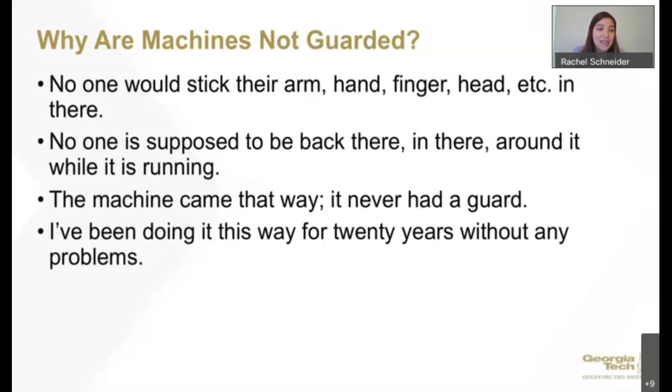And then, the guard is in the way, right? So during this webinar, we are going to discuss different ways that you can guard your machines. If a particular guard is in the way, or if it's introduced a new hazard in itself, then you will want to reevaluate your machine and see if there are alternative ways to protect your employees from the machine hazards.

And then, the OSHA inspector didn't say anything about it. Just because the OSHA inspector didn't say anything about it does not mean that you are now exempt from guarding your machinery. There are many reasons why an OSHA inspector may not address a particular machine. Maybe you had an industrial hygienist as your inspector and they were focused on health hazards, or maybe they were just focused on a particular area of your plant.

And then, we'll put it back on if OSHA comes. So when it comes to machine guarding, the point is not just to please the OSHA inspector. The reason why OSHA exists and the reason why the machine guarding standard exists is so that employees are protected from machine hazards, so that they're not killed or seriously injured on the job.

So one of the main concerns with machinery and machines not being guarded properly are amputations. And amputations can occur on many different types of equipment if they are not properly guarded.

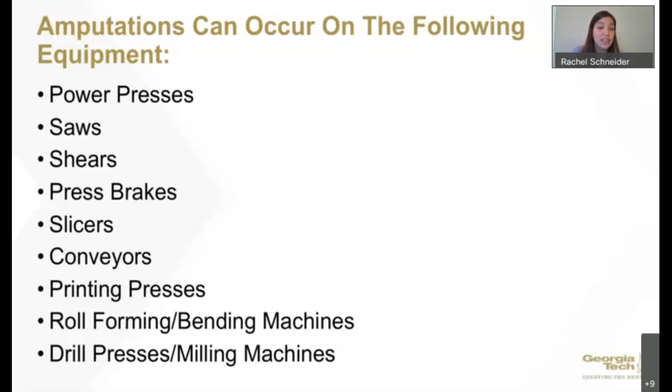Hazards can occur in several places on a piece of equipment. They can occur at the point of operation. So say you have a shear, the point of operation is going to be that shear point, where the cutting is being done. Or if you have a press, the area where the press comes down is your point of operation. If your hands are in that area when the machine is operating, it's very likely that you could lose some fingers or a hand.

Machine hazards can also be present on your mechanical power transmission equipment, like belts and pulleys, chains and sprockets, rotating shafts, flywheels, basically any equipment where a piece of clothing, a limb, or hair could get caught into or around it. Those are all going to be hazards. And then any other moving parts, so any rotating parts, sometimes vibrating or shaking parts may also pose a hazard.

When you guard machines, you want to make sure that they prevent hazards, so employees should not be able to access those machine hazards. The guards also need to be secured to the equipment so that employees can't just lift them off. I have been to plenty of facilities where they have a guard that's placed tenderly over the equipment, and then an employee needs to inspect something and lifts it up easily, and now they're exposed to those hazards. That's not okay. Your guards have to be secured to your equipment.

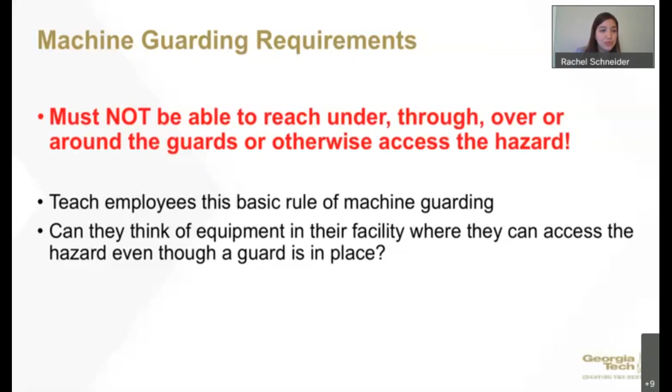Here are some examples of different machine hazards that may be present. We've got chains and sprockets, meshing gears, a punch press, belts and pulleys, even fans, a bench grinder - the bench grinder is actually well guarded here - a rotating auger, and a shear. All of these pieces of equipment would need to be guarded.

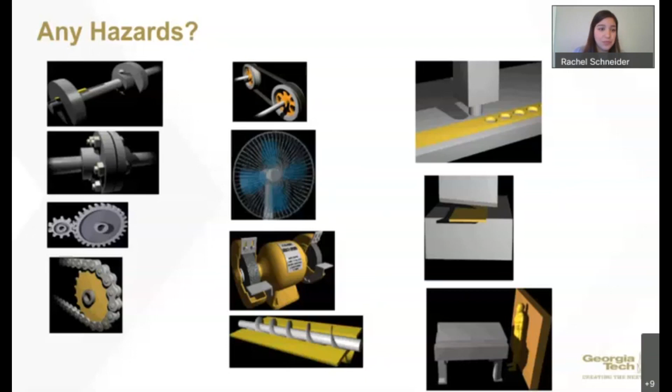There are three different methods of machine safeguarding or machine guarding, and we'll get into each of these methods in more detail. You can have physical guards like your barrier guards, you can have devices like light curtains or laser systems or pressure sensitive mats, or you could also guard by location or distance.

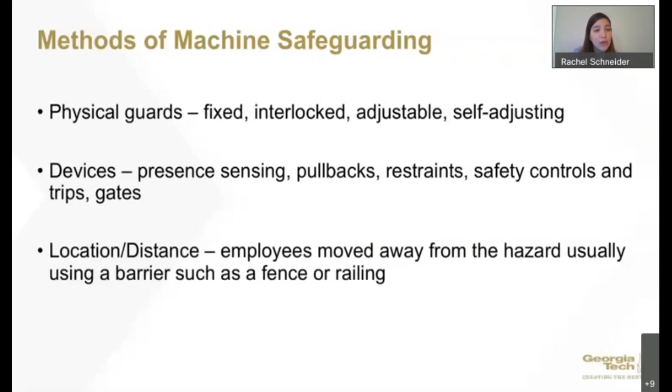Physical guards may be fixed guards, secured to a machine. Say maybe you have a chain drive or chains and sprockets, then you would close them with a fixed guard or a barrier guard. Physical guards may also be interlocked, so that if you open them during the operation of the machine, it will shut off. Some machines are going to be equipped with adjustable guards, where the operator will need to adjust the guard to accommodate for the size of the stock being worked on.

Other guards include self-adjusting guards, where the guard will actually adjust based upon the width of the stock that's being fed into the equipment. An example of a self-adjusting guard is a hood guard on a table saw - as you're feeding wood into the saw, the guard lifts up and allows you to feed the stock in. When we talk about presence sensing or safeguarding devices, we're talking about light curtains or laser systems, where if you break the plane, the machine will shut off.

We really don't see pullbacks and restraints anymore as a means of guarding, but they were once used to guard machines like press brakes to prevent operators from accessing the point of operation. We do see safety controls and safety trips, such as trip wires, pressure sensitive mats, and two-hand controls. And we also see gates, which are used to prevent the operator from being exposed to the point of operation once the machine begins to operate.

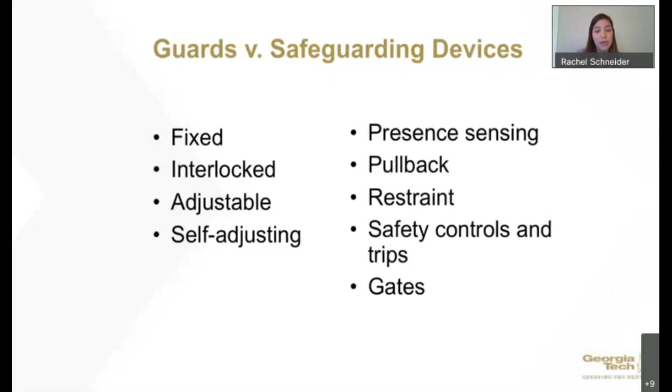All right, so this is a diagram that demonstrates how large the openings in a guard can be given the distance the guard is from the point of operation. One device that we use as consultants is what we call the gotcha stick, which is basically used to measure exactly what this diagram is showing. On the x-axis, you have the distance between the guard and the point of operation, and on the y-axis, you have the maximum opening allowed in the guard. As you move further away from the point of operation, the size of the opening allowed in the guard increases.

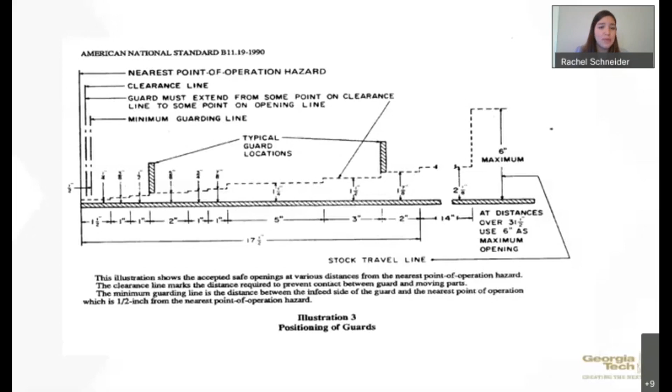So these gotcha sticks are really useful, especially if you aren't sure if a guard is sufficient. You can use the device against the guard to see if the openings are too large or if they're sufficient. I know you can get these online - Rockford Systems sells them, I've seen them on Amazon before, but they're very handy.

Whereas these guards may not be favorable for hazards at the point of operation where moving parts are performing work on the stock. So if a fixed guard isn't feasible or practical for guarding the point of operation, there are still several different types of safeguarding that are possible.

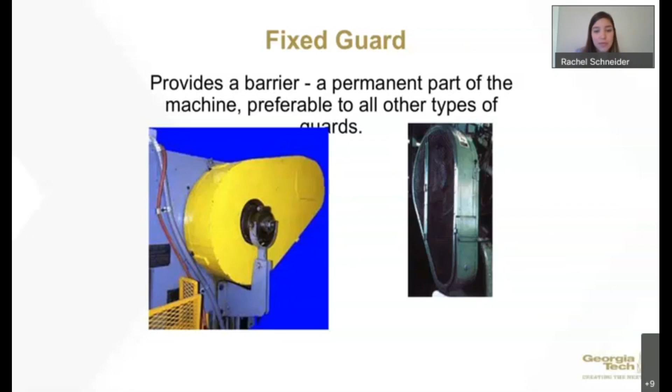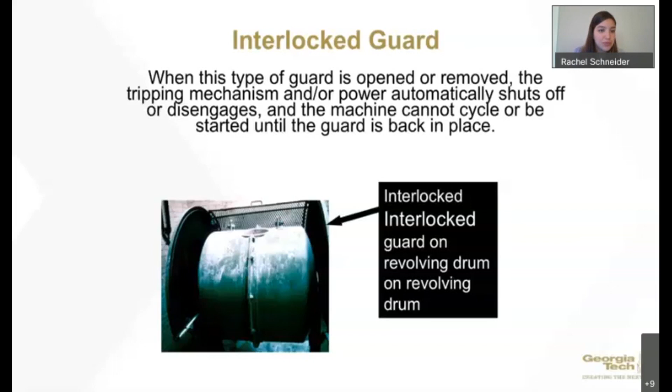We typically see adjustable guards being used on bandsaws, but with bandsaws you want to make sure the non-working portion of the blade is guarded. If you have vertical bandsaws, you want to check underneath your tables and make sure the blade underneath the table is also guarded. So when I say the non-working portion of the blade, that means the area where the work is not being done. Only the part of the saw where the cutting is being done can be left exposed - everything else would need to be guarded.

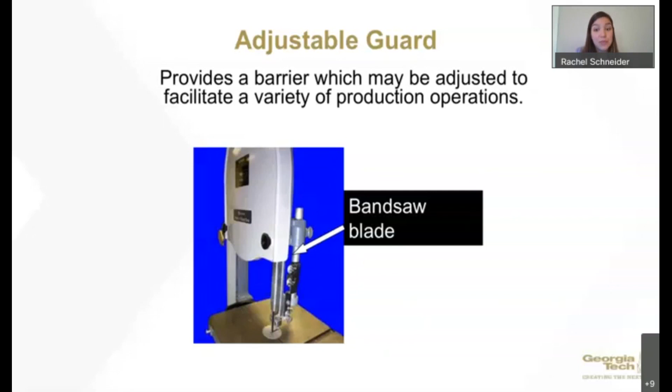With self-adjusting guards, the guards themselves will move and adjust according to the size of the stock being worked on. These guards are frequently seen on woodworking equipment, like table saws, chop saws, and radial saws too. Self-adjusting guards do avoid that potential for human error associated with just your adjustable guards, but the main problem we see with these guards is that employees will take them off. So if you have self-adjusting guards on your equipment, just make sure they stay in place - if they're in place, they'll do their job, but you need to make sure employees are not removing them.

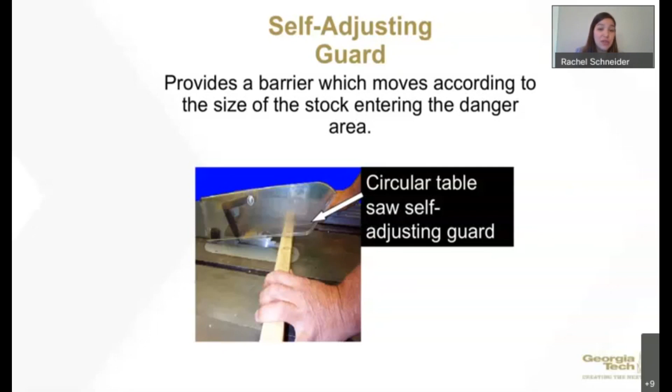All right, so now we will move into some different types of safeguarding devices.

Presence sensing devices include light curtains, laser systems, also bump guards. With light curtains and laser systems, you have to set up the rods, and then they create a plane, and whenever the machine operator crosses the plane, the machine will stop operating. These are very effective ways to guard machines such as press brakes and power presses, but you still need to make sure they're set up properly and that they're functioning properly.

I have seen plenty of power presses where the front and the sides of the press are equipped with light curtains, but then the back of the press is left completely exposed. So you do need to make sure every area where employees may access the hazard is accounted for. Employees should also test the light curtains or laser systems to ensure they are functioning properly.

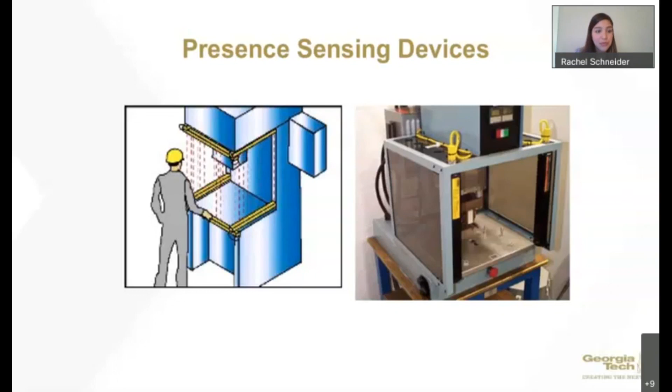All right, so here is an example of a light curtain. You have the rods on both sides, and those pink bars represent the invisible plane. If that employee crosses that plane, the machine should shut off. This is a good example of a well-guarded machine because not only do you have the light curtains at the front, but you also have barrier guards on the sides of the machine as well.

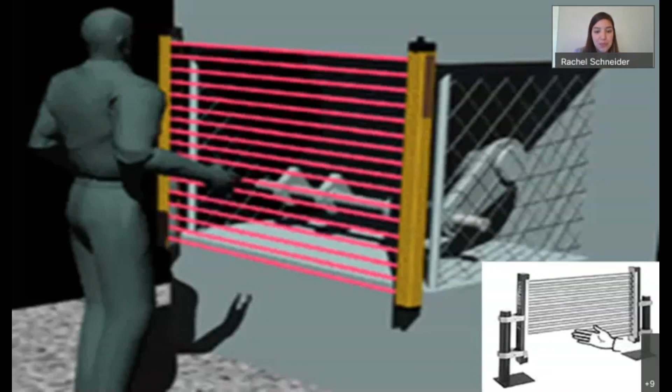There we go, I think I accidentally zoomed in. There we go, all right.

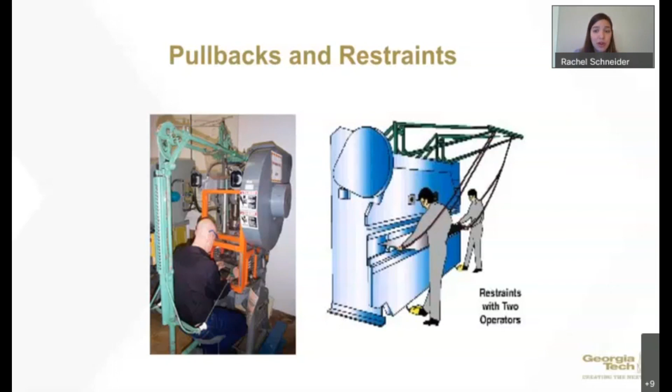Now, we do see two-hand controls quite often. With two-hand controls, the operator needs to apply pressure to both controls in order for the machine to operate. One thing you need to keep in mind is whether other employees in the work area are also protected. If the operator is the only one in the work area and it's not possible for other employees to be exposed to the machine hazards, then two-hand controls may be sufficient. But if you have other employees who may also be exposed to those hazards, your two-hand controls need to be supplemented with another means of guarding to protect them.

You also need to ensure that employees are not bypassing these guards. They can get really creative when it comes to bypassing two-hand controls. I've heard of employees setting down their forearm to press down the controls while using their hand to make adjustments to the equipment or the stock. Or maybe they'll have one employee push down the controls while another employee is exposed to those machine hazards. So you need to make sure that all potential access points for both the operator and employees in the area are guarded, and that employees have no way of bypassing these controls.

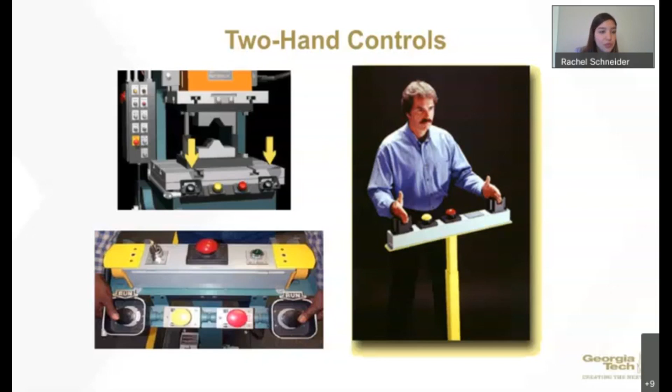So safety tripwires are devices located around the perimeter of a danger area or near the danger area. When the tripwire is pulled, the equipment will stop. With tripwires, the operator must be able to reach the cable to stop the machine. I've seen tripwires that are way up high, and it would be very difficult for an operator to reach them, especially in the event of an emergency, so they do need to be easily accessible. The machine also needs to be able to stop fast enough for this to be considered a sufficient means of guarding.

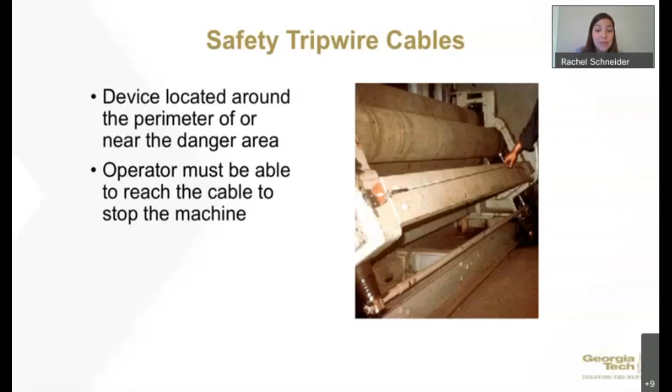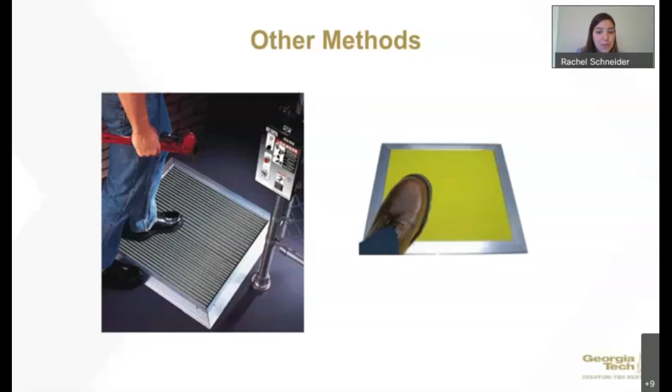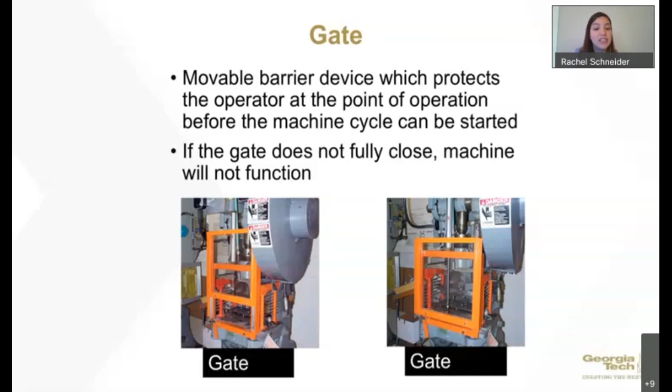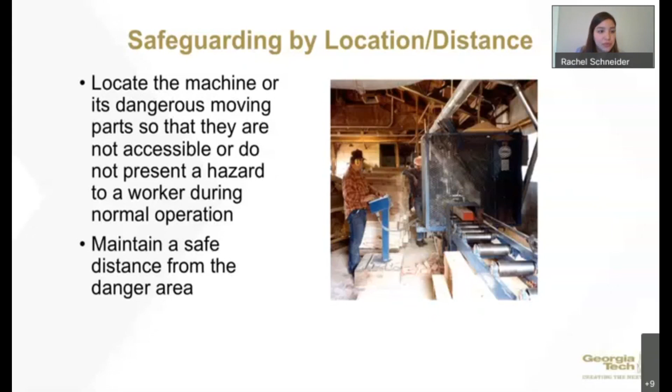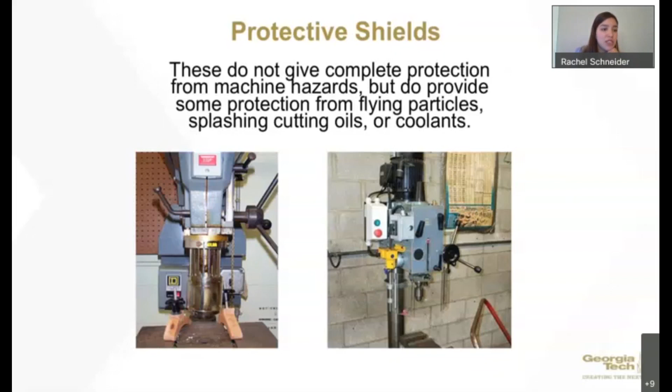On the left, we have a telescoping chuck guard. We don't recommend companies use these because they tend to be a nuisance and get in the way of the work that needs to be done, so employees are likely to just remove them. We do recommend the type on the right, which is like a plexiglass shield, often with a magnetic base, that you can just put over the point of operation. These are a lot easier to use. So drill presses, lathes, and milling machines need to be equipped with these chuck guards.

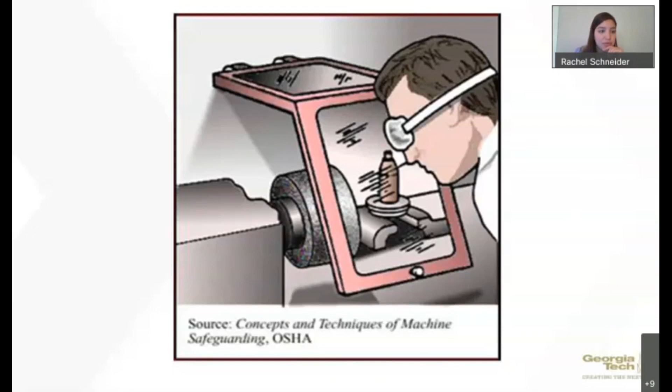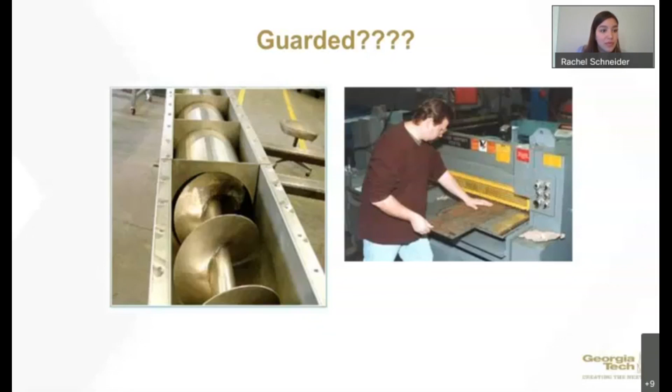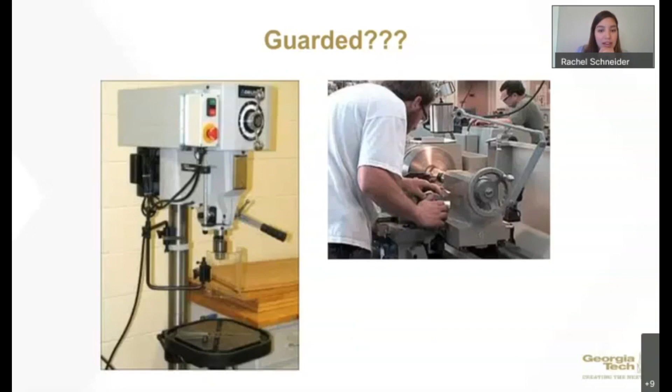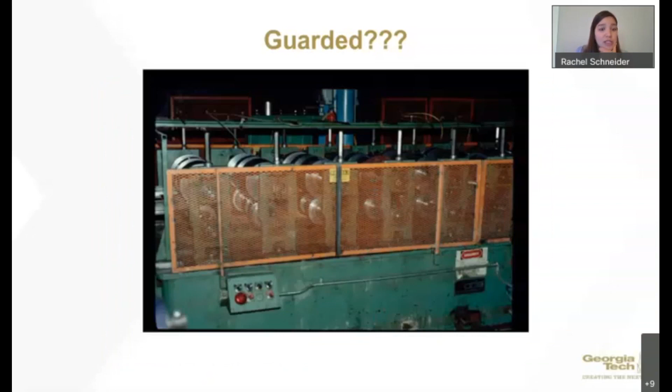All right, what about this equipment? Think about what we talked about at the beginning, where you shouldn't be able to access the hazards by reaching under, over, through, or around the guards. It looks like you could probably reach over this guard, so this guarding would not be sufficient. And if you come around to the other side, you can see that it's completely exposed. So this is not a good example of proper machine guarding - you would need to add a lot of guarding here. Yeah, Steven says it's not sufficient - that's correct.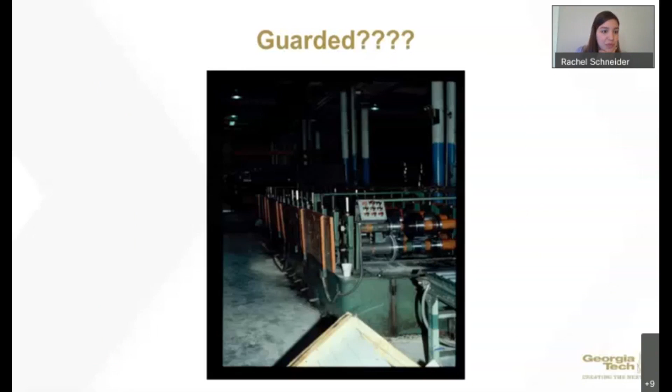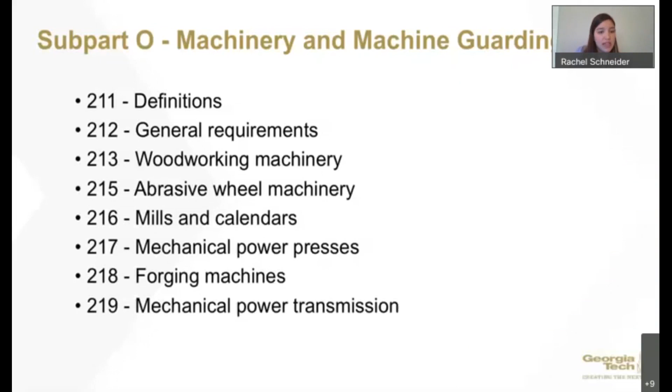Okay, so I'm going to briefly cover one of the machine guarding standards. OSHA has several different standards that address machine guarding. 1910-212 includes the general machine guarding requirements, whereas the rest of the machine guarding standards address specific types of machinery. For example, 215 covers grinders or abrasive wheels, and 217 is mechanical power presses.

1910-212A1 includes the overarching general requirement that employees must be protected from machine hazards, such as those created by the point of operation, in-going nip points, rotating parts, flying chips and sparks. So if a particular machine hazard cannot be cited under one of the machine-specific standards or under the point of operation standard, then it's going to be cited here. This is kind of considered like the general duty clause for machine guarding.

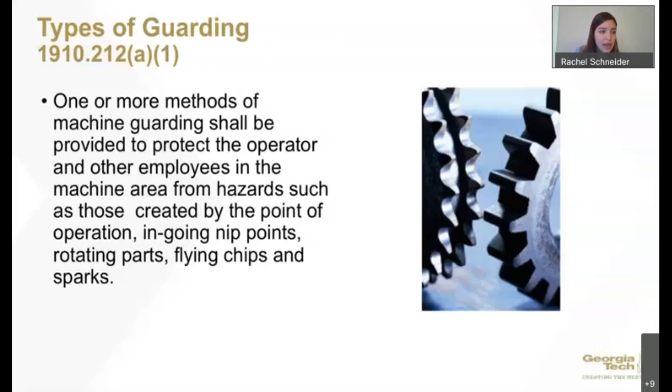And then 1910-212A3II gets a little more specific. This is where point of operation hazards are cited. Quite simply, the standard states that the point of operation on machines must be guarded.

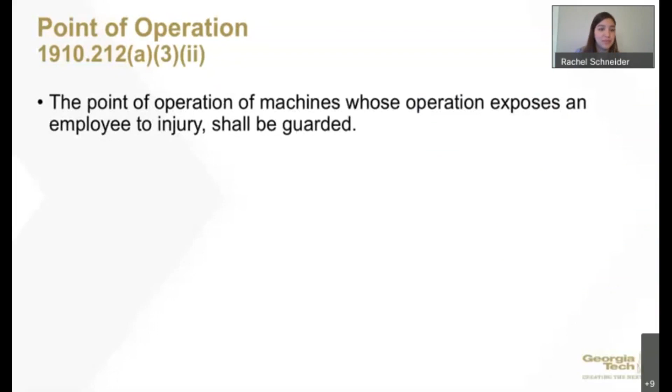Let's see here. All right, so here's an example or a photo of a press brake. Again, these are used to bend metal, and you can see here that the point of operation is not guarded. This press brake was actually involved in an amputation. There were two operators, one on the foot pedal, and the primary operator thought that the other operator was all set, so he stepped on the pedal and started the machine. However, the other operator was still feeding the stock into the press, and so several of his fingers were amputated.

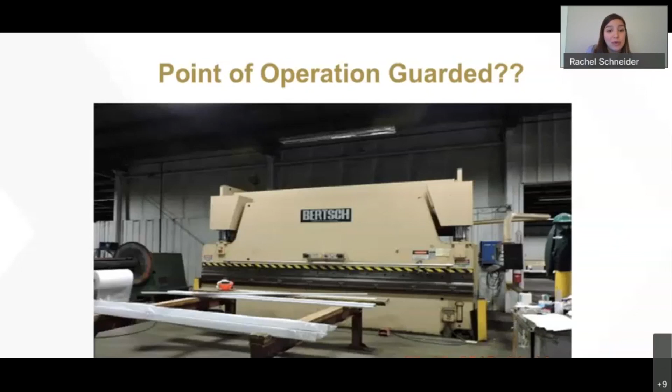Fan blades - if you have a fan that is located 7 feet above the floor, or less than 7 feet above the floor or working level, then it needs to be equipped with a guard, and the openings in the guard cannot be greater than 1/2 inch.

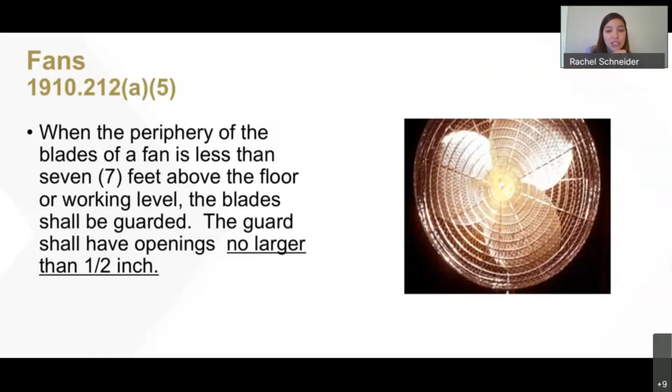And then what about hand tools? Are hand tools considered a sufficient means of guarding? They're not, right? So hand tools cannot be used as a substitute for guarding. They can be used, but you do need to make sure that your proper machine guarding is also in place.

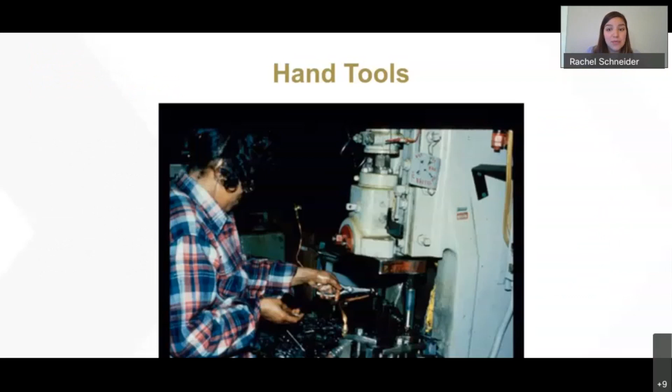And then lastly, machines do need to be anchored to prevent walking. We call it walking or moving when they're in operation. We oftentimes see drill presses, pedestal grinders, and belt sanders also not being anchored. But once a permanent location for a piece of machinery has been identified, it does need to be anchored to the ground.

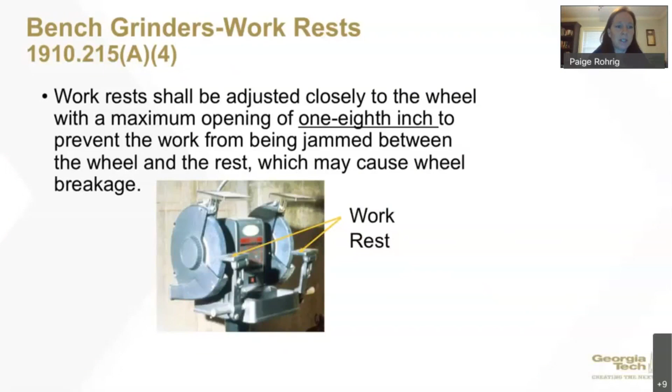The main things you want to do: make sure it has a work rest, and make sure it's within 1/8 of an inch of the wheel. Make sure you have your guard here. And know that every time you use your wheel, that tool rest needs adjusting because that wheel wears down every time you use it, so you want to keep adjusting it to the right distance. The tongue guard can't exceed 1/4 of an inch from the wheel, and note how that tongue guard is put on - occasionally I go to companies and they have it in the parallel position rather than the perpendicular position.

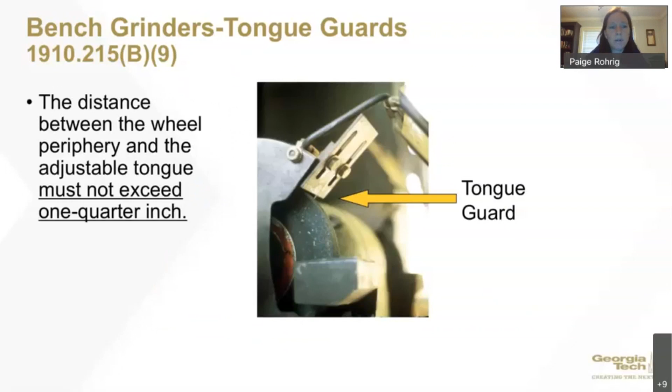You just want to make sure that it is put on there properly and adjusted to within 1/4 of an inch of the wheel. And you will have to make sure that the wheel itself is inspected prior to mounting, because if there's something wrong with it, if it's a damaged wheel, then it could break.

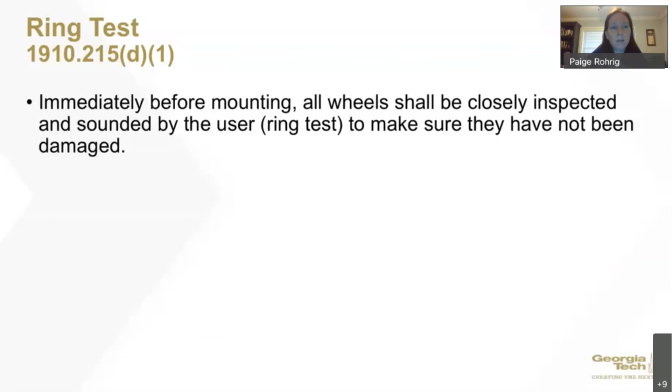You would have flying parts that could cause a serious injury or even a fatality. So immediately before mounting, you want to make sure that the wheels are closely inspected through a ring test. So you would hold the wheel in a vertical position, strike it with a non-metal object, and if the wheel creates the ringing effect, it should be in good condition. But if there's a crack or something, it'll have a dead space and be more of a thud, and you won't hear that ring.

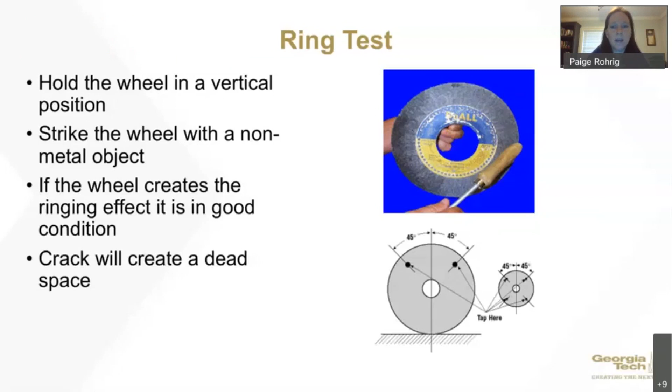Regardless, when you put the wheel on, make sure you're not standing in front of it when you start it for the first time, because even if you do that ring test, something could still be wrong. So you want to make sure that you take all precautions prior to starting up the equipment.

And so we have a tech guide. If any of you want access to this, let us know and we can send this to you. We have a lot of companies that use these and put them up by the grinder as a reminder to people as to what those measurements are and what the safety requirements are for the bench grinder. They also have those little tools that you can buy that have the 1/4 inch and the 1/8 inch so that you don't have to constantly get out your tape measure to make sure it's adjusted properly. They can just use that little tool and put it in there and make sure that it's adjusted properly.

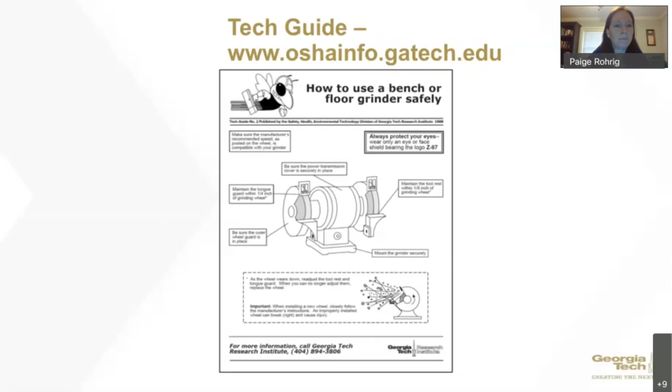And then 1910-219, mechanical power transmission apparatus. Rachel talked really briefly about this at the beginning, how a lot of these are going to have your fixed guard in place. So if you have shafts, any kind of rotating shafts, they have to be guarded if they're 7 feet or less above the floor or platform. But what you really want to remember, although there is the 7-foot rule for machine guarding in general, if it's accessible, it still has to be guarded.

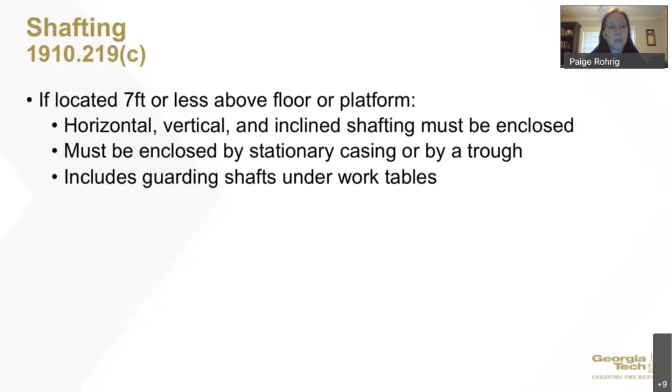So even if it's 7 feet from a platform, but you have people working up there that can still access it, maybe they're really tall and they can reach their hand right up there and access it, then still make sure it's guarded. So the 7-foot rule is not a bad rule, but please make sure that if it's accessible, it does get guarded. So you got to make sure that your shafting, all your rotating shafts, are guarded.

And your shafts that stick out, so your projecting shaft ends, if you guys can see these two sticking out here, they cannot stick out more than half the diameter of the shaft. So you would either cut it off so that it doesn't stick out more than half the diameter, or you would put a cover on it like the bottom picture. So you have to make sure that those are guarded as well. And obviously in this top picture in particular, there's a lot of guarding issues that you would want to take into account. That top guard right there doesn't seem to do much of anything.

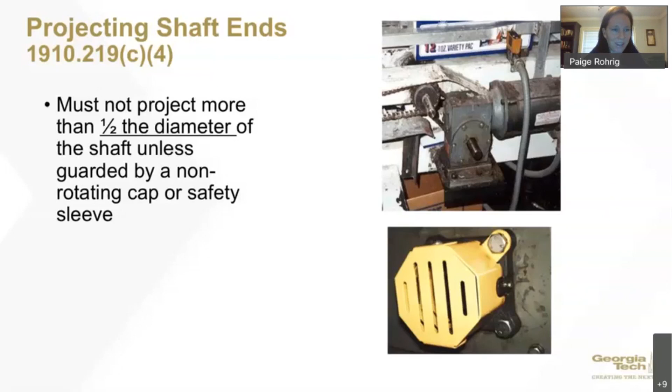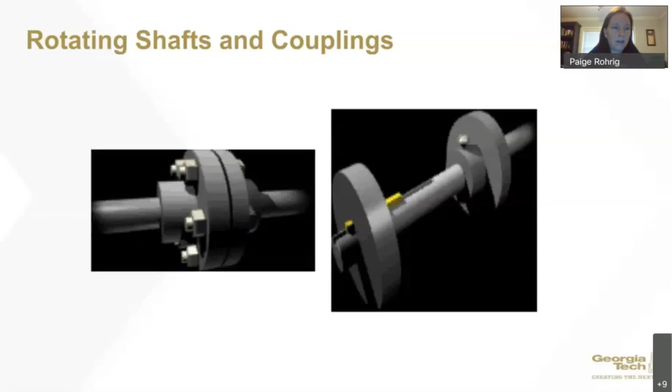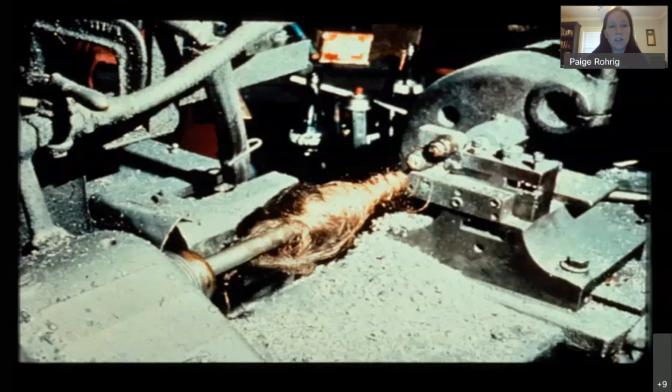And here's a picture, an actual picture of someone's hair that got wrapped around a rotating shaft. There's another picture we have that we don't show because it bothers people, it makes their stomach turn a little bit, but it actually shows the person with half of their head, the scalp, the hair taken off of their head. So this can happen. It has happened. It does happen. So make sure that your rotating shafts, even if they're smooth, they need to be guarded.

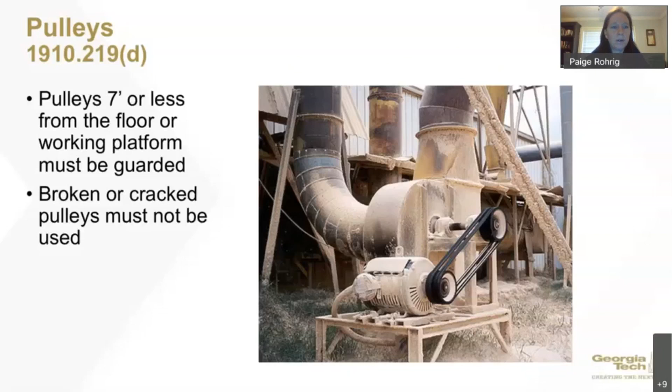Any pulleys, your belt and pulley right here, that needs to be guarded. If you can see there in the middle, it looks like you also have a projecting shaft end that's sticking out. So you want to make sure that those are guarded, and broken or cracked pulleys should be taken out of service or not used. And this picture, I use this picture all the time.

I see this picture all the time, and every time my stomach turns with that guy's head right there by that belt and pulley. This could be one of those things where it's down in a room people don't go very often, or maybe it's up high, but at some point people do go there because there's accessibility right now. That guy's head is right by that belt and pulley, so it has to be guarded.

Belt, rope, and chain drives again have to be guarded. You can see a picture here where we've got lots of belts and pulleys and rotating parts that all need to be guarded.

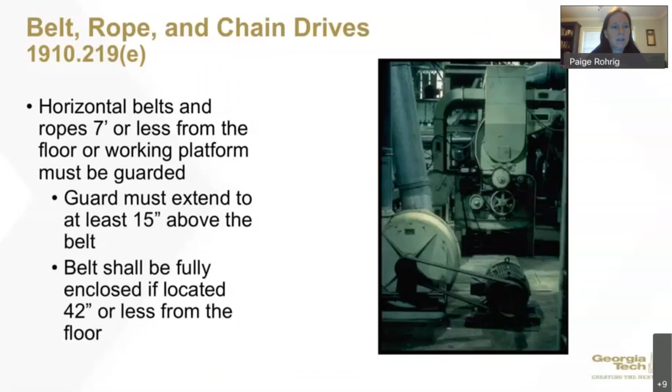So you have to install additional guarding on that to guard those gears. Gears would always have to be guarded. And your chain and sprockets is very common. We see this all the time, so you want to make sure that these are guarded as well.

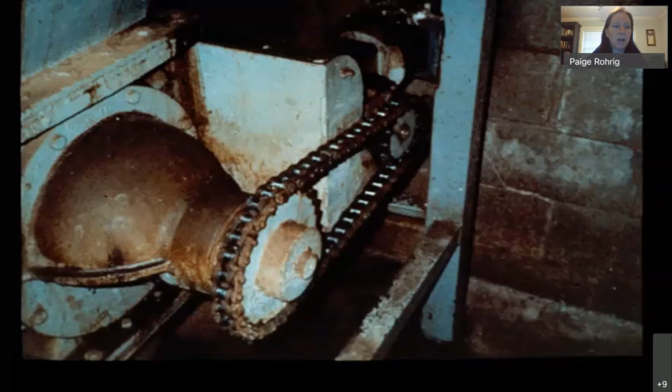Keep in mind, when you've got chains and sprockets and belts and pulleys, look at the back side of them too. Make sure that they're guarded, but also check: can I reach over that guard and access it from the back? Because we see that happening a lot as well. So make sure that it's fully guarded so that you can't access the hazard.

Portable hand tools - one of the main things I'll tell you is just follow manufacturer's instructions and keep them in good condition. If there's something wrong with them, make sure they're taken out of service. And when I say taken out of service, don't just throw them in the corner because someone will use them again. Make sure you have a good out-of-service process so that they don't just pick it up and use it. It is the employer's responsibility to make sure they're in safe, good working condition, even if it's personal tools that employees brought in themselves.

Compressed air should not be used for cleaning unless it's regulated down to 30 PSI or less and has effective chip guarding and PPE. Compressed air, when you're using air guns and air nozzles, is usually used for cleaning, so make sure it's regulated down to 30 PSI or less when dead ended.

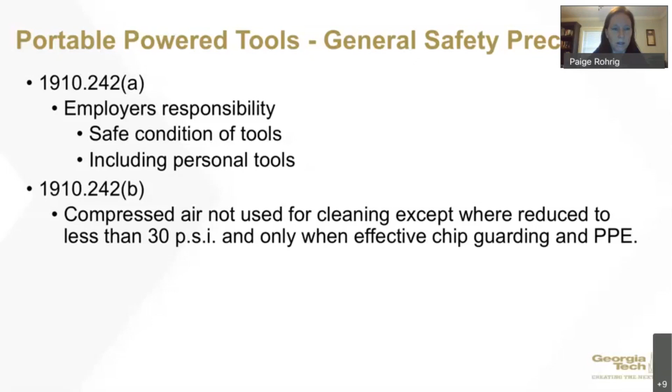A lot of times you'll see nozzles that have little slits in the side, so if it goes against your hand or body part, the air will go out the side and you won't have more than 30 PSI going through that end. It's really important to train employees on that - it can cause embolisms and other serious injuries. Make sure employees aren't cleaning themselves off, blowing themselves off with those compressed air guns.

Make sure all your electrical power tools are fitted with safety guards and switches. And like I said, with all hand tools, power and not, make sure you're following manufacturer's recommendations on how to use it, how to maintain it, what kind of inspections need to be done, and when it should be taken out of service. So this would be a hammer, and we'd see something like this a lot.

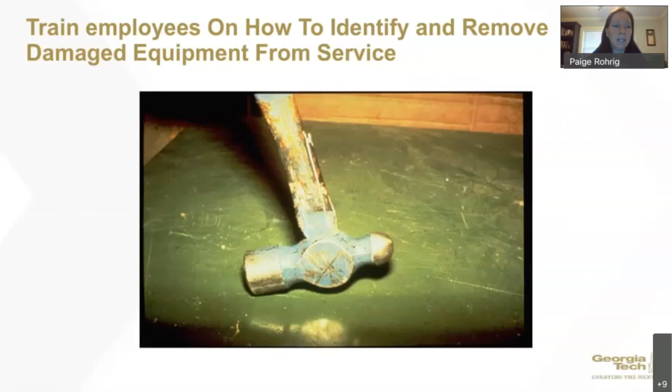What happens a lot of times with something like this, they put tape on it, right? You put tape on it, it's all good because duct tape fixes everything - so we would not want to do that. You need to train employees to identify those hazards and take it out of service. Let them know that you will buy them another hammer - they don't have to keep using this one, because the head will fly across at some point and hit somebody. This is very, very common.